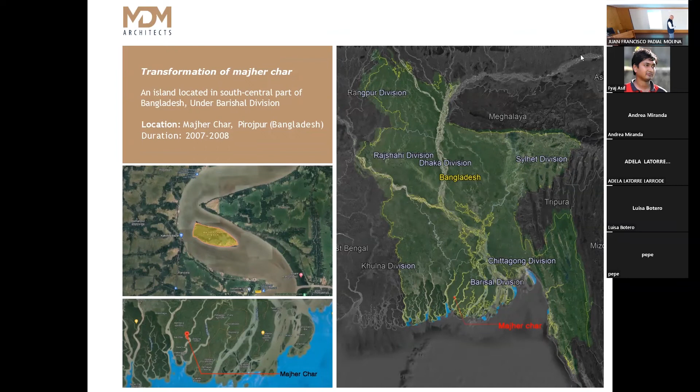We had a limited budget, about 150,000, so roughly 1,500 per house for the project. In Bangladesh, which is a very hot and humid country, we used hollow block walls for construction, and it was reinforced.

You can see this - it's reinforced from the foundation to the roof, so it doesn't collapse. We changed the roof to a ferrocement roof instead of CGI sheet, to reduce heat gain. But the downside is it's very heavy, so you have to hold the structure tightly so it doesn't collapse in an earthquake and so forth.

So you can see all this is reinforced. This is what we built for them, and that's the picture you see here.

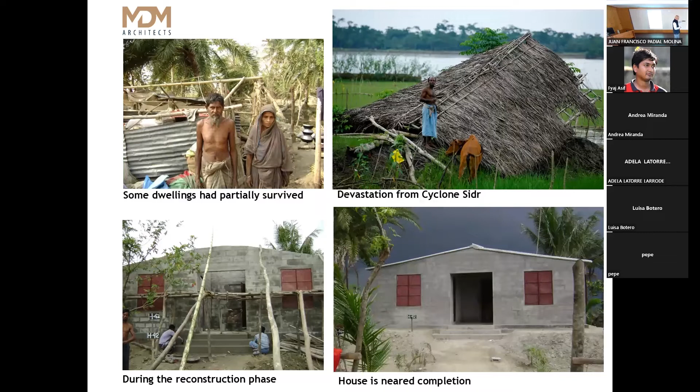We wanted a low-maintenance construction - not traditional timber windows and timber doors, which you have to change frequently. So we went for steel doors and steel windows, with hollow blocks and ferrocement. Every house also had a solar panel for electricity.

After completion, you can see the complete house, which was renovated. We didn't just build houses - 167 houses - but also road infrastructure, a jetty to moor the boat, and addressed the environment where high tide sometimes comes into the land.

We completed that, and it changed the people's lives. We also provided seed, tractors, and so forth. The British High Commission was involved, and UNDP provided the cost for the roof, while UNICEF provided a toilet for each house. That's what we did for this project, and it truly transformed their life and livelihood.

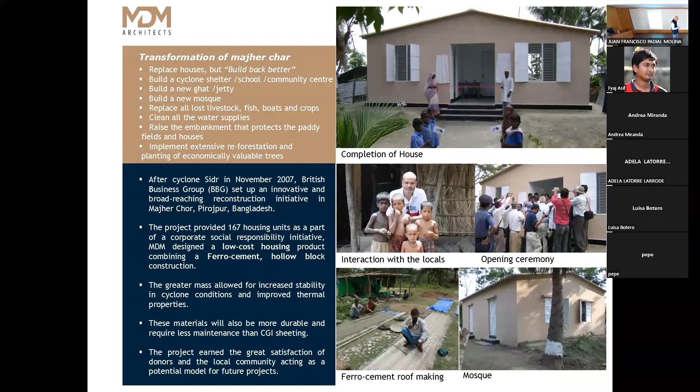After cyclone Sidr, the International Federation of Red Cross asked us to build shelters for 1,250 families. They had a limited budget - 1,000 euros equivalent for each house.

Working with the local people, we thought we could build only one room, sized 15 feet by 10 feet, as a strong house. We decided to build that core correctly, so people could then build around it according to their need. This makes the house safer in the long run, since that core shelter gives them a foundation to build on themselves. I'll show you the pictures later.

We had a limited budget, so on this project we used corrugated sheet on top, since that's common, but we added a lot of ventilation because the walls are made of bamboo mesh. This lets hot air pass out and cold air come in. There's also a steel angle frame which is quite rigid, and the columns are assisted by that structure.

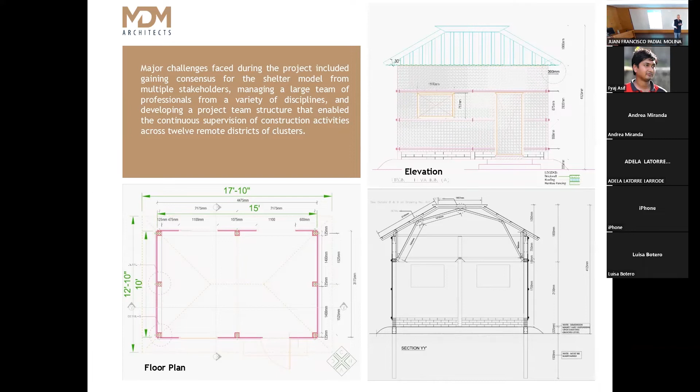That was the intention behind it, and then we put the grade beam and 4 courses of bricks to make it weight, so when there is a high wind, it can't uproot the structure. A year later there was another cyclone, and nothing happened to this single structure. So it's quite tested that it works.

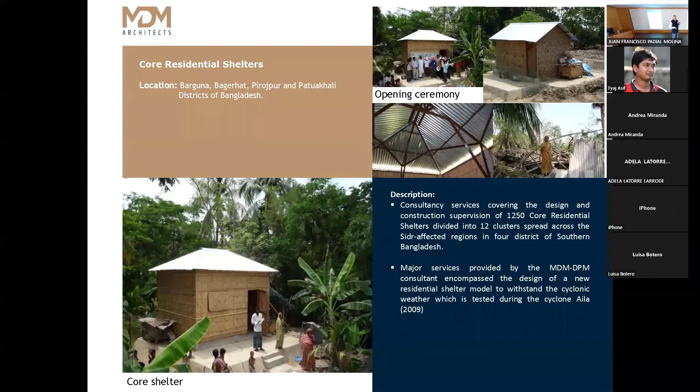So this is the core shelter we did. One thing is quite important, this height is a little bit—this one is 14 feet high. The reason behind it is people will build around it, so you need the height for your pitch of the roof and so forth. That's why it was intentionally made higher, about 14 feet. Normally in Bangladesh, house or room height will be 10 feet, so it's 4 feet from the pitch.

That was our intention, that we will build this core shelter, and people will build around it as per their need. You can see this one is transformed a different way, this one a different way, and this one different. So they built around it—it's safe because you have a safe structure in the middle, so people can build around it.

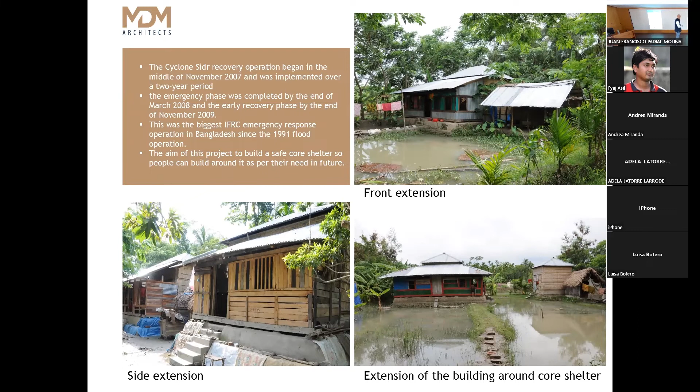Most Nepali houses have pitch roofs, and Nepal had a problem—when we built it in 2014, electricity was 2 hours on, 2 hours off, so you don't have continuous electricity. Whatever we design, we had to bear in mind that this is a blood bank, so the blood will be in the freezer, and you need continuous power supply. A lot of things we had to take care of, that this building is functional, because Nepal has earthquakes.

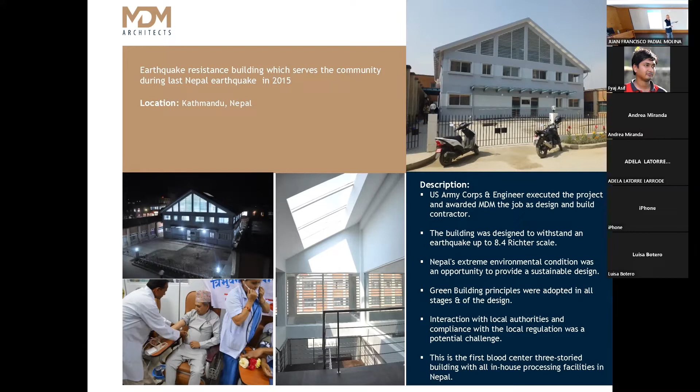It supplied 75% of the blood of Kathmandu Valley. That's something, because the way we did it—we put the blood separator and everything—they could supply blood to a lot of people. That functioning went very well, and we are very happy it did its job. This came in a US journal, about how this building performed during the earthquake.

This building has earthquake design. Normally, if you look at the soil condition, you don't need it, but for the liquefaction potential we didn't want to take chances, so we put in piling. We did about 60 feet of piling, 49 of them, so each column has a pile.

We put it in such a way that first we found out what the function of the spaces would be, and then we put the columns. The column grid is not bigger, we didn't use a bigger span, we used a smaller span.

One thing we did intentionally: all the partitions are plasterboard with stud walls. So in terms of any earthquake, there's flexibility, the building can move, and that's why you did not get any cracks when this earthquake happened.

At the same time, everything has less weight because of the plasterboard construction. That happened in Nepal. It's sort of the first time that major construction used plasterboard so extensively.

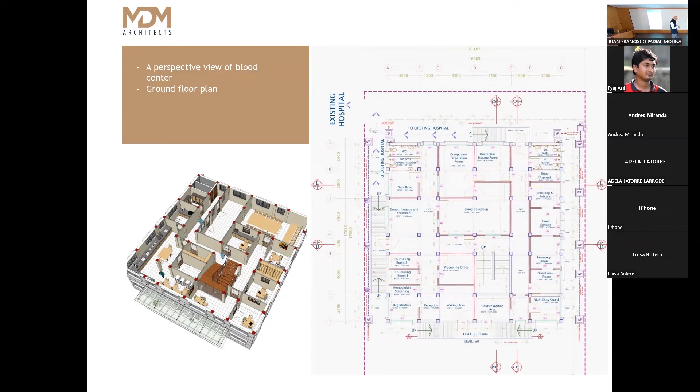We had to import the plasterboard from India, and the studs as well. We took a lot of pain because we wanted to do something different, something that will last and do its job. So everything was proven after the earthquake, that it did its function.

And then we are doing another project in Bangladesh, funded by the US government and executed by the US Army. We work with the US Army, and so far we've built a lot of multi-purpose cyclone shelters, MPCS.

Why do we call it a multi-purpose cyclone shelter? In peacetime it will be a school. On the weekend it will be a maternity and child clinic. And in an emergency it will be a cyclone shelter. That's why we call it a multi-purpose cyclone shelter.

If you look at this building, it looks like a very ordinary, simple building. But there was a lot of intention behind it - all these holes downstairs are there because when there's a cyclone, people bring their livestock with them. It's not just them taking shelter, they bring their goats, their cows, everything.

So they can tie their livestock there. That's the intention, that it's solid so they can tie it. That's why we intentionally made it that way. And if you go upstairs...

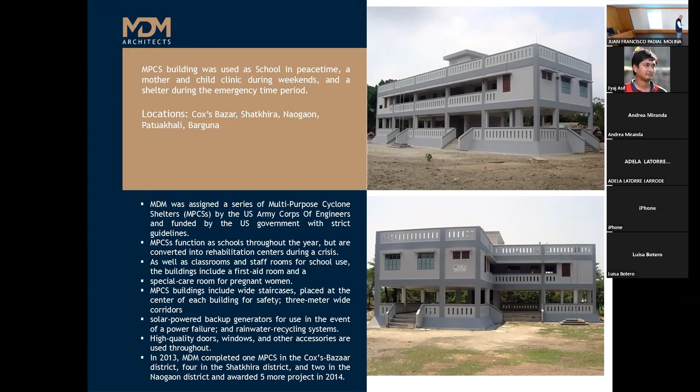You can see this is the mother and child clinic, and this is the school room and teacher's room - that's the first floor. The ground floor is for the cattle, and the rooftop is extra space in an emergency if they need it.

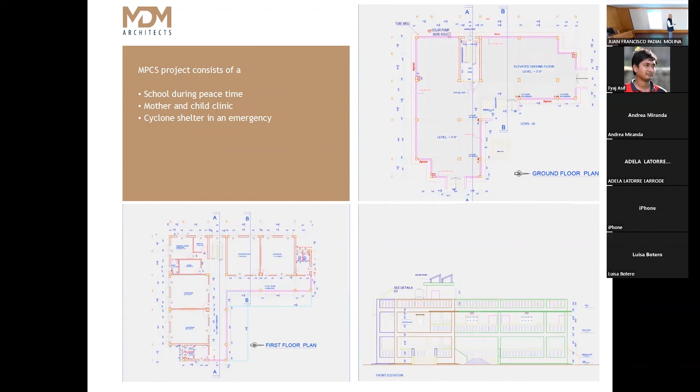So it's a school during peacetime, a mother and child clinic on weekends, and a cyclone shelter in an emergency. That's the section - you can see on the rooftop there's a solar panel, a filtration system, and a tank.

So rainwater, after filtration, comes into this tank, and then people can use it. Outside there is a tap where people can use it.

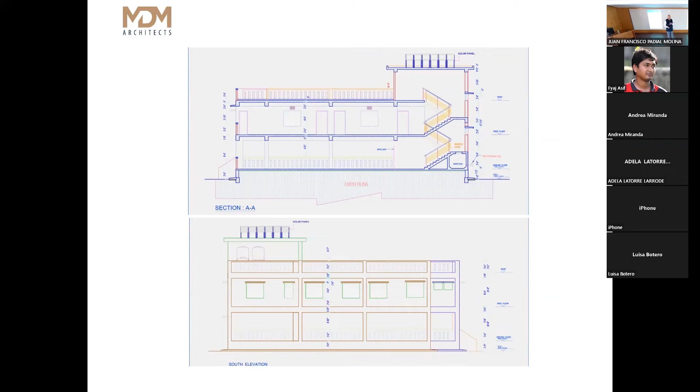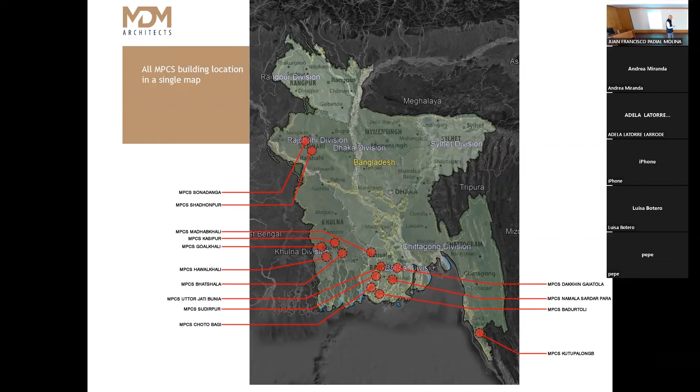So I'll find out more when I go back.

Then we did this project, the Coastal Crisis Management Center, for the Bangladesh Coast Guard. In Bangladesh, we have a lot of problems in the coastal belt with miscreants who attack innocent people and fishermen. For security purposes, we built this center. Although it's for the Bangladesh Coast Guard, in emergencies it will also serve as a cyclone shelter, since certain parts of Bangladesh have fewer cyclone shelters. So we are doing two things: Coast Guard security, and in emergencies it becomes a cyclone shelter.

You can see this is a little different than MPCS, but the reason is this height is really good, and this is less. For doing this building, since they are all in very remote areas, you don't have information on flood height or fresh flash flood levels for the rivers.

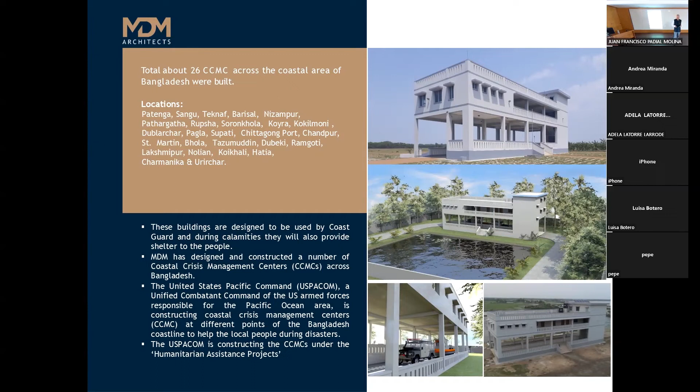So our engineers went to the site and made a sort of record. You can see this - all our drawings, we built 26 of them, and all of them have those marks showing what is the flood level and what is the highest tide level.

So what we did, when we built it, some sites needed 20 feet of filling - a huge filling - to build those houses above the flood area. And then this height, because the Coast Guard has a lot of boats, some quite expensive, we call it the defender boat, which they put on a trailer and bring here.

One thing I didn't know when we started this project - during a cyclone, boats are not safe at mooring. Either they have to be taken off the water, or left out at sea, not moored. If you moor them, the boat will be damaged and destroyed. So when they get a warning signal, they either go to a safe zone or out to sea.

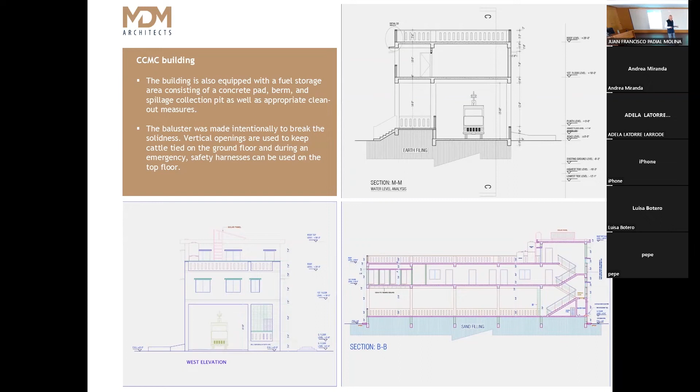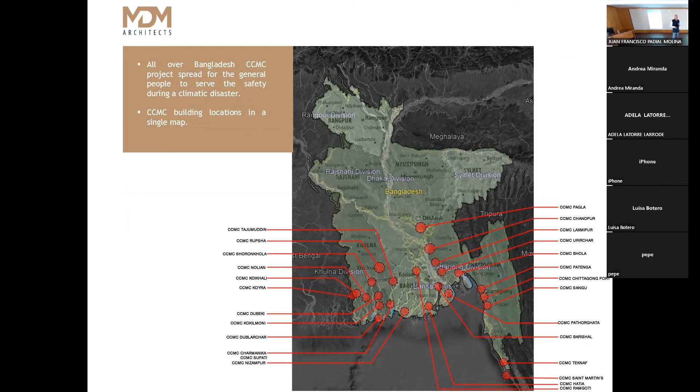These areas, you can see, are mostly the coastal belt and near the rivers as well. As I said, for the Coast Guard it will be for their security, and in emergency times it will be for the people.

This is the project probably a lot of you heard from international media, Bhasanchar. It's an island we developed, but it's not meant for the Rohingya, but for the Bangladeshi people. This project is called Ashrayan, under the Prime Minister's office, and we are building housing for the homeless. But at the moment we are in crisis with the Rohingya refugees, so we are building for them at the moment for 100,000 people. A township developed for 100,000 people, and our time limit was 1.5 years.

It's in the middle of the sea, in remote places, so building this was challenging. And why do we call it the beacon of hope? Because for the people of Rohingya, this is the place they live in.

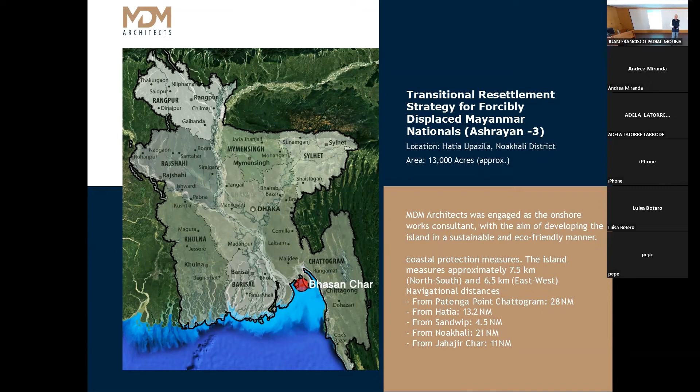The Prime Minister wanted to improve their quality of life, so she instructed us to do something about it. We made a proposal and went to the Prime Minister, she agreed, and we started the project with a time frame of 1.5 years.

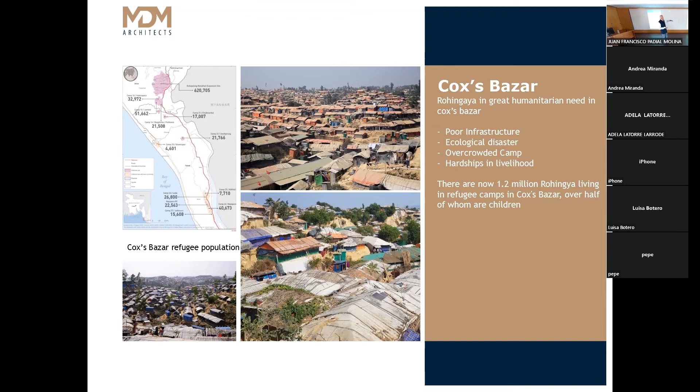This is the hill - they cut the hill and built that. This place is vulnerable and subject to landslide as well. That's the standard they live in, so we need to improve it, because we can't work there at the moment since it's a crowded place. That's why we changed it to Bhasanchar.

And Bhasanchar, before we moved there, this was the Bhasanchar. 13,000 acres of land is there, and out of that we took about over 4,000 acres to do the settlement.

So that's what we did. But this island, at high tide, used to submerge in water about 2 feet, so we couldn't do any construction while there was water there. So we had to build an embankment around it.

The embankment is 12.5 kilometers long, to protect the area during construction. That was our first job, and it had to be done in the dry season. We were thinking in 2017 we'd start in November, on site by February, and we finished it the following year. That's the time frame, and everything is specific to those dates because you have to account for the monsoon and the availability of workers.

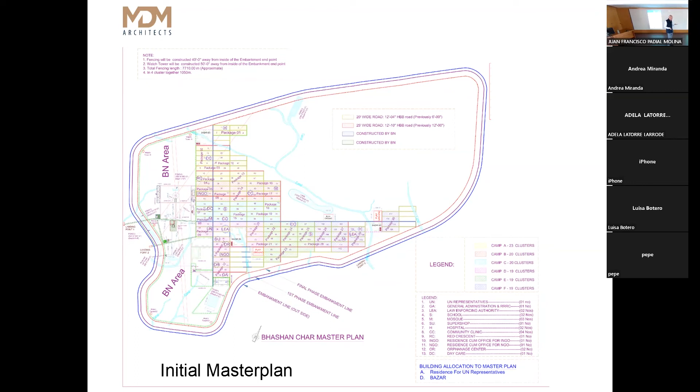When we were designing it, we visited the site with the Navy, because otherwise you can't go there. We did all the examination, soil tests and everything, and then started the construction.

This is the Bhashanchar construction, and we call it cluster formation. We built 120 clusters, because if you want non-cluster formation, your construction won't be quicker—we have to give it to the contractor and they will build it.

So for cluster formation: we have 12 houses like this, and then a cyclone shelter. 786 people will live here, so they can easily access it. This shelter's capacity is 1,000 people. It's a 4-story cyclone shelter, a steel structure we imported from Vietnam. The building is steel structure with hollow block walls and corrugated sheet on top—I'll explain a little more later.

This is a 100% eco-friendly project in the sense that it has solar power, rainwater harvesting, biogas, and we also have green means for processing waste. So everything in this project, we tried to keep in mind that we wanted it to be as eco-friendly as possible.

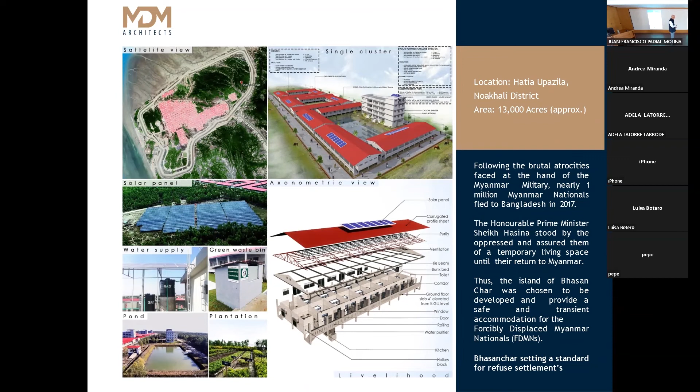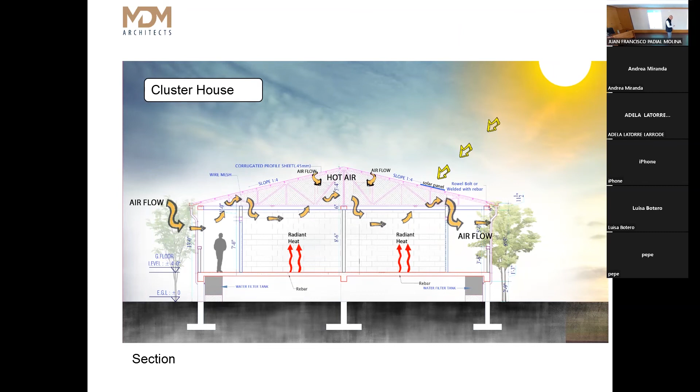You can see that when we were designing it, in terms of ventilation, these two rooms are back to back, so air can pass through, with windows in the front. This is the ventilation approach we used to ventilate the place, and at the same time we have enough ventilation escape from the upper part—cross ventilation as well.

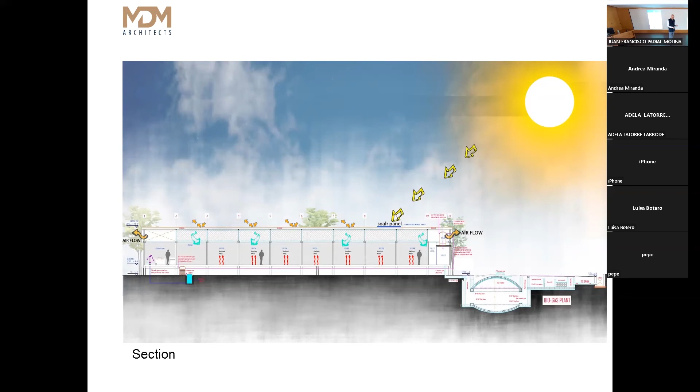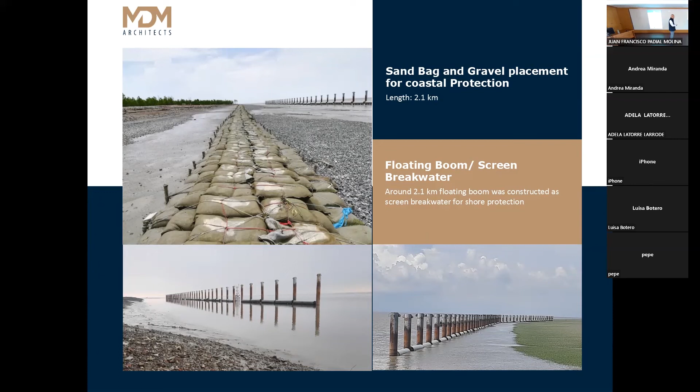That's the embankment—you can see it's now 19 feet high all around. The second phase, we are just completing, so that will be done within the next few months.

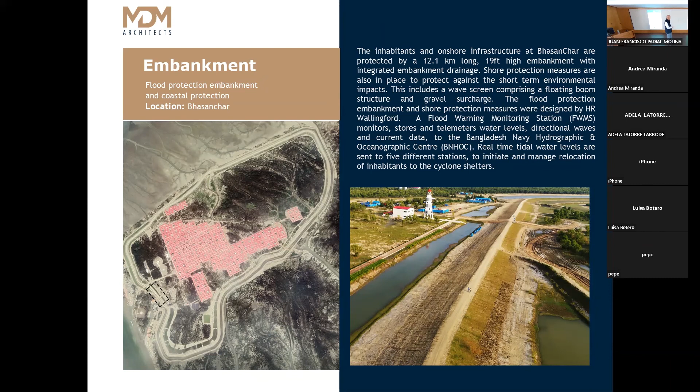That's another thing I was talking about before regarding sea level—this is the zone that is flooding now. Something is due to climate change, something down to the greenhouse effect, we don't know, but we need to investigate and find out the reason. But the question is, like in the past, Bangladeshi people will bounce back and find a solution themselves. It's something we can't control—like the day before yesterday there was an earthquake in Afghanistan and 1,000 people died. So in many different parts of the world, these things are happening, and people are looking for solutions.

And people like us, and probably technical universities and so forth, we can collectively share our experience, and build a network to find solutions worldwide. One purpose of my talk is to make people aware of the difficult situations we are in collectively in Africa, Indonesia, Bangladesh, or wherever - different parts of the world, different problems - and how we can find a solution.

That's it, I think. Thank you. I don't think I have anything else. Okay, if you have any questions, I can answer.